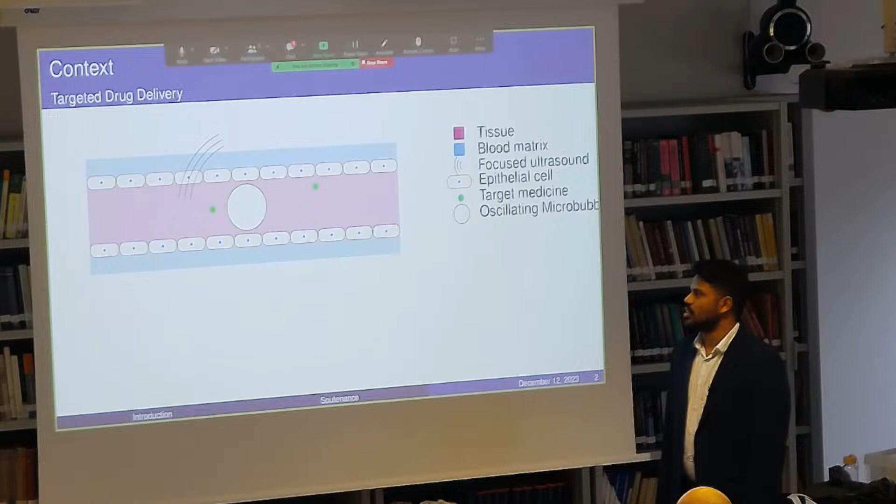Once it reaches the target location or the tissues where there is a tumor, you can use focused ultrasound. These microbubbles respond to the ultrasound waves. It can have a stable cavitation or a collapse, and it can increase the porosity of the capillary. Capillaries are the smallest arteries, which have the thickness of just one epithelial cell. So if we can attain some porosity on this layer of epithelial cells, we can increase the intake of medicine at the target location.

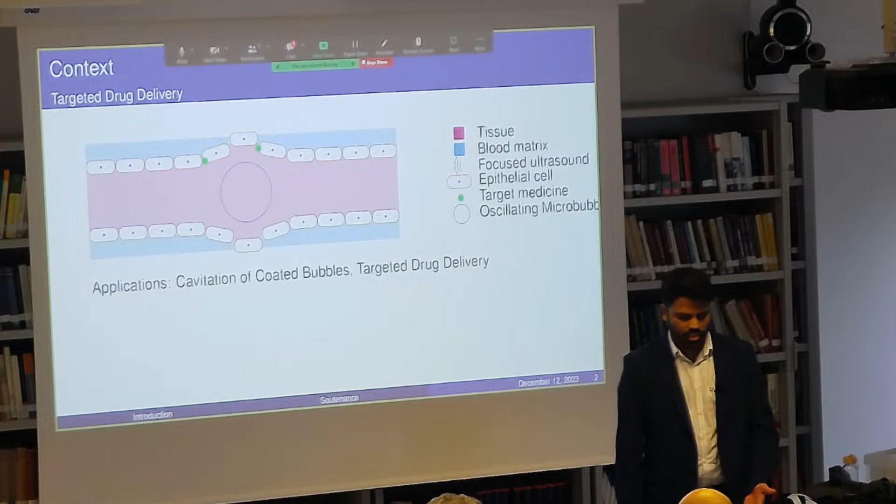Coming to my particular problem, the problem involved here is a very complex multiphysics problem. It involves a bubble which is responding to ultrasound. So here we have a multiphase system. We have a blood matrix and also a microbubble. The further complexity is this is a compressible multiphase flow, because we have a compressible microbubble involved, and these microbubbles interact with the epithelial cells. So we have to capture the fluid structure interactions also.

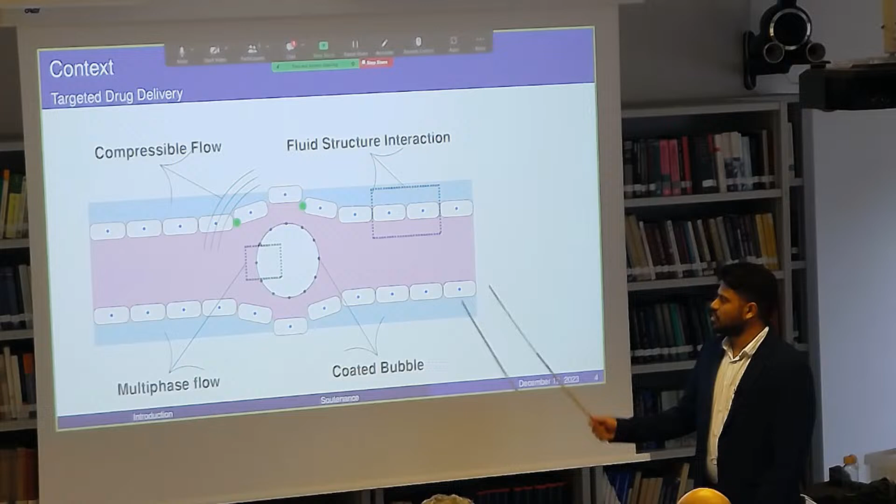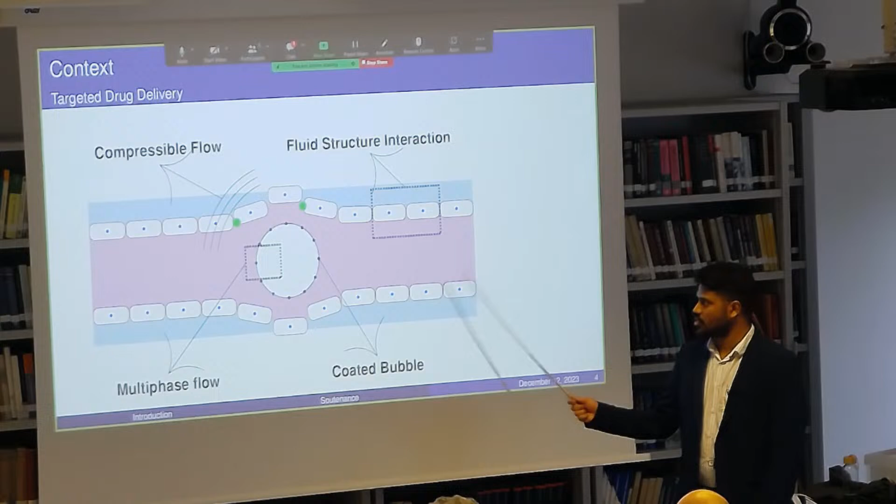We are trying to capture all this except the coated microbubble, because it's out of my work. And our approach was to capture minimalistic simulations of cavitation. So we had to focus on developing a multiphase flow code that can capture compressible flows and also the interaction of these microbubbles with the blood vessel.

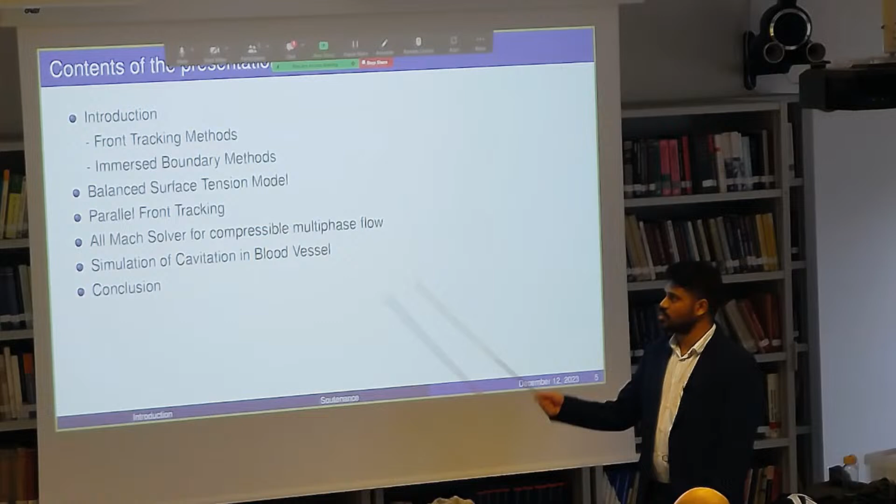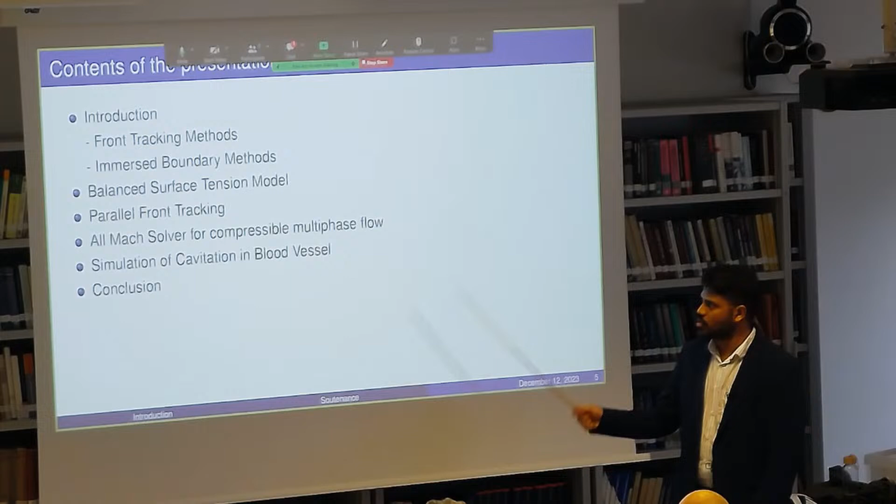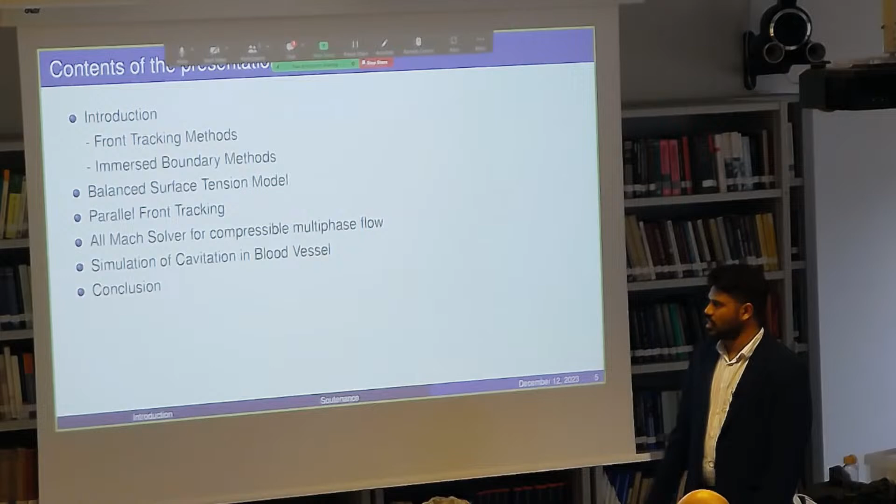The presentation has an introduction on simulation of multiphase flows using front tracking methods, and also development of immersed boundary methods with a similar approach in the code, and a balanced surface tension model in 2D. The main focus of my work was developing a parallel front tracking method. That is the one on which I have spent most time. Then the next one is extension to a compressible system, and just one simulation I'm showing here, which involves cavitation of a microbubble inside a blood vessel.

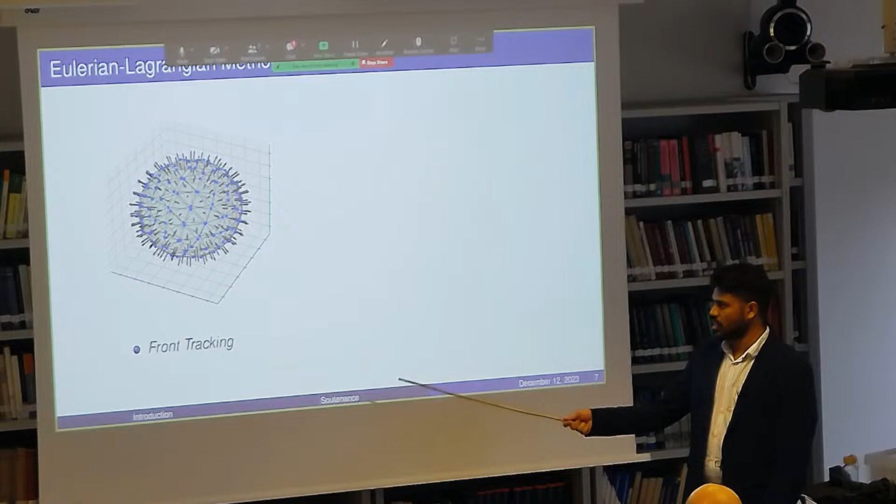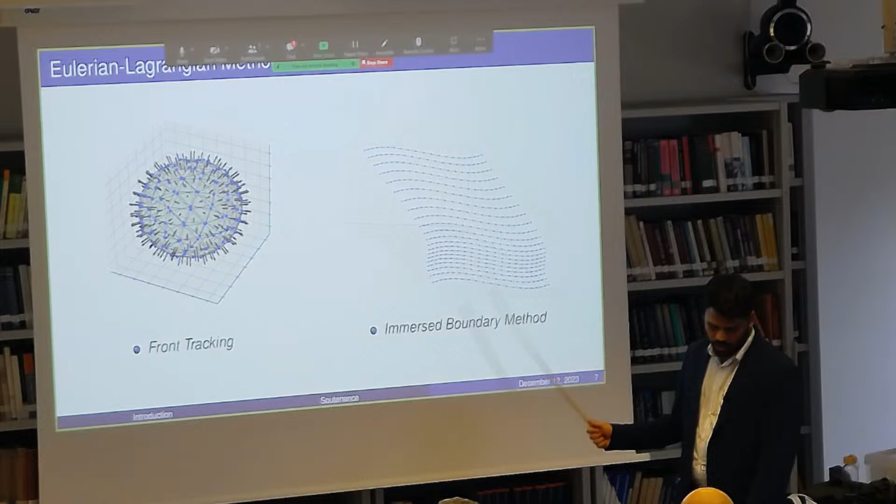So both the front tracking method and immersed boundary method can be put under the Eulerian Lagrangian system of numerical methods. In case of front tracking you have an interface separating two fluids, and in case of immersed boundary, if you assume the membrane is of zero thickness and constituted out of fibers which are independent from each other, then we have this kind of structure for a membrane. So we are trying to simulate mostly 2D and axisymmetric simulations involving both.

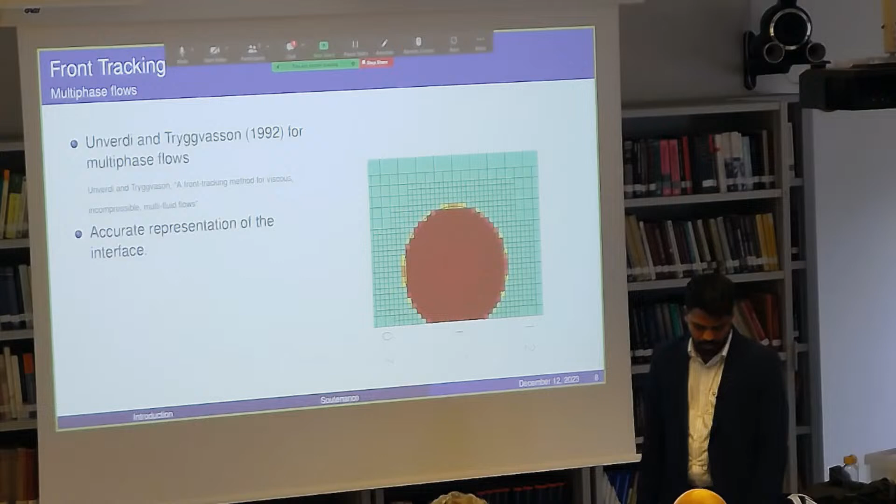So the front tracking method is developed to capture multiphase flow simulations. So here you have an example of a contact line problem. It was developed by Unverdi and Tryggvason. It is inspired by the immersed boundary method originally done by Peskin.

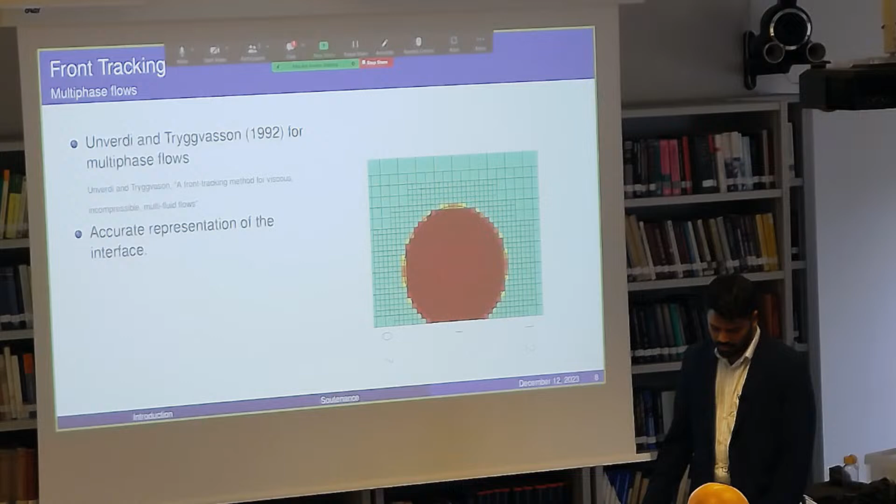So the advantage of the front tracking method is that you have an explicit representation of the interface compared to other multiphase flow solvers like volume of fluid and level set. You have explicit information on the interface. This gives the advantage of an accurate representation of the interface, and also better computation of geometric properties like curvature, etc.

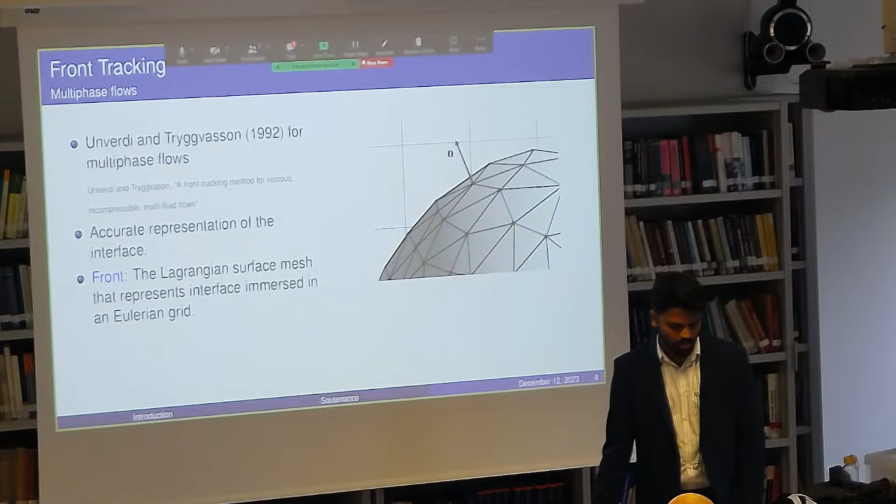So you have a Lagrangian mesh that represents the fluid-fluid interface that is immersed in an Eulerian grid. In 3D, this is comprised of connected triangular elements. We'll call this interface the front, as in the literature. It represents the fluid-fluid interface in the case of front tracking, and we can use the same term for the membrane in the case of the immersed boundary method.

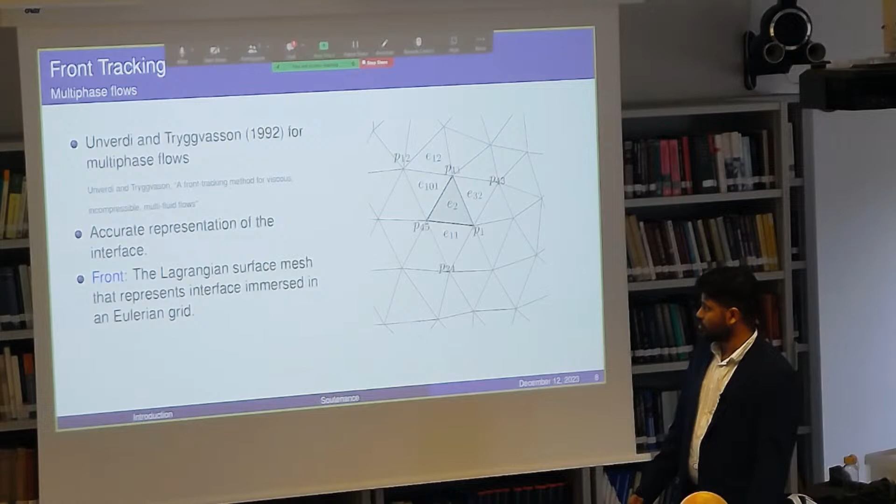So the front is comprised of elements, which in 3D are triangular elements, as we have done in the coding, and these elements are comprised of vertices. We have a data set for that, we also have a data set for the triangles, and we also maintain how these triangles are connected to each other.

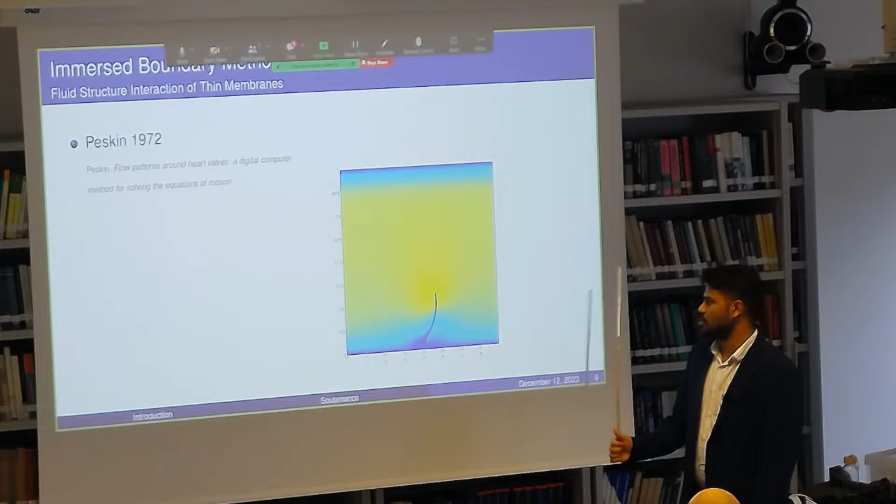Coming to the immersed boundary method, you have a thin membrane which is interacting with the flow. It was originally developed by Peskin in 1972, where he did a simulation of the interaction of blood flow with heart valves.

Coming to the representation of the interface in the immersed boundary method, in a 3D simulation you have a mapping from R2 to R3 corresponding to the initial configuration and the final configuration. At any moment the configuration has an elastic energy which can be written as a functional of the points and the geometric properties of the topology. Any change in the topology corresponds to a change in the energy functional, from which you can calculate the Lagrangian force density. This I will mention in coming slides.

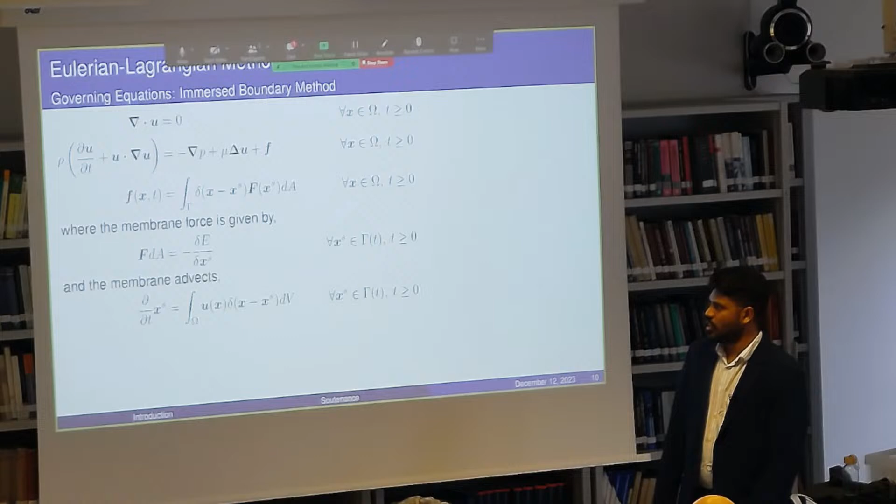So both systems, since they involve fluid, in the case of the immersed boundary method we have the Navier-Stokes equation with a source term corresponding to the membrane force. The membrane force can be represented as a Fréchet derivative of the energy functional, and that can be interpolated to the Eulerian grid using a discrete delta function. The membrane advects in time using the local velocity of the marker point, which we calculate from the Eulerian grid using a delta function.

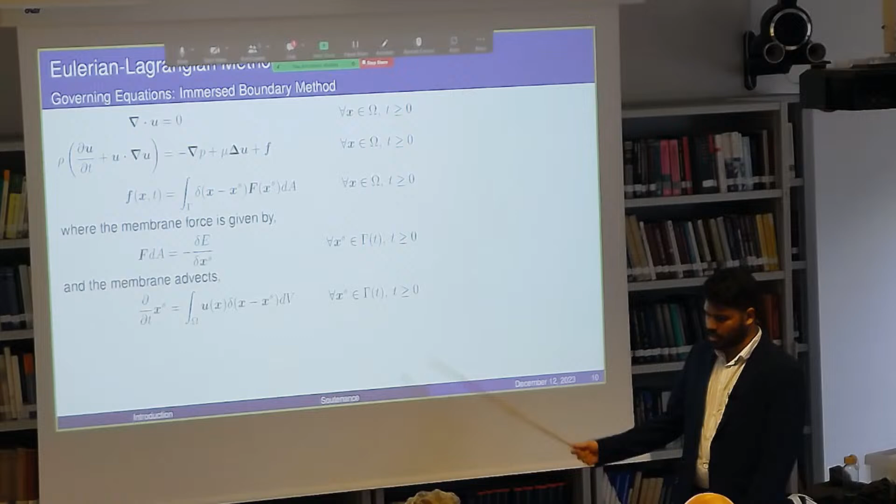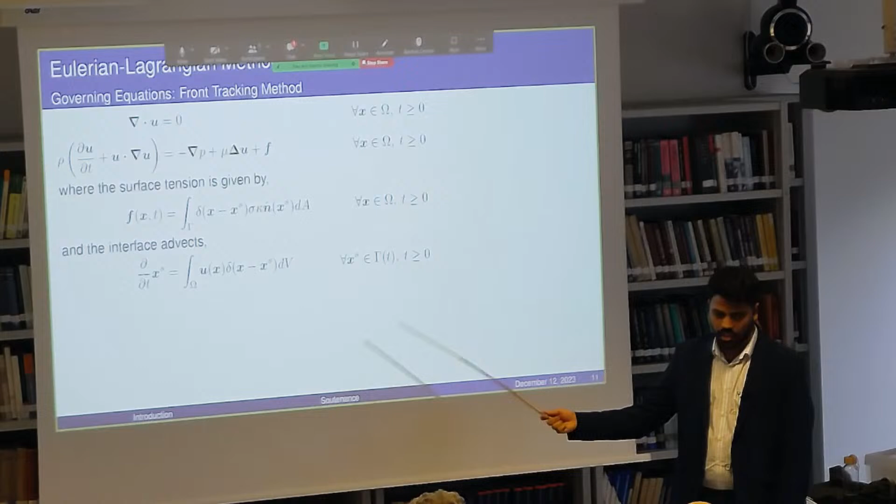In front tracking it's similar, except instead of using a Lagrangian force density from an energy functional, here we calculate the Eulerian force density from an interpolation of the surface tension. And similar to the advection of the membrane, the fluid-fluid interface also advects with the local velocity, which we calculate from the Eulerian grid.

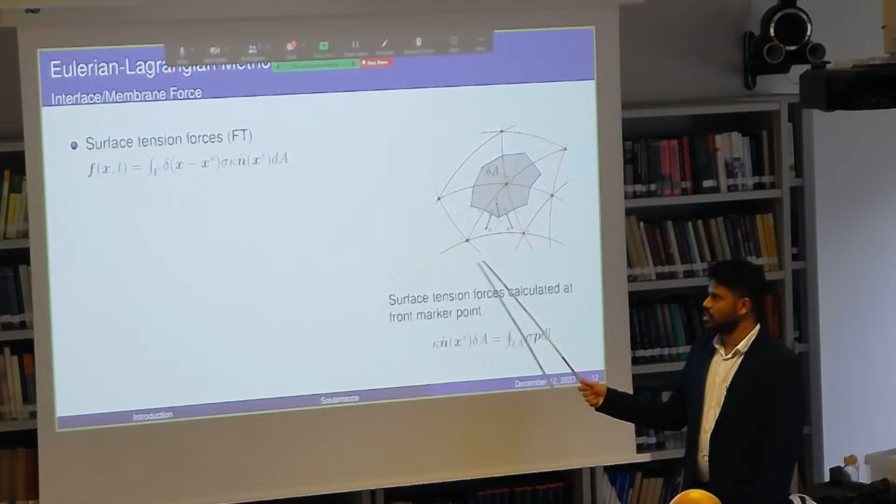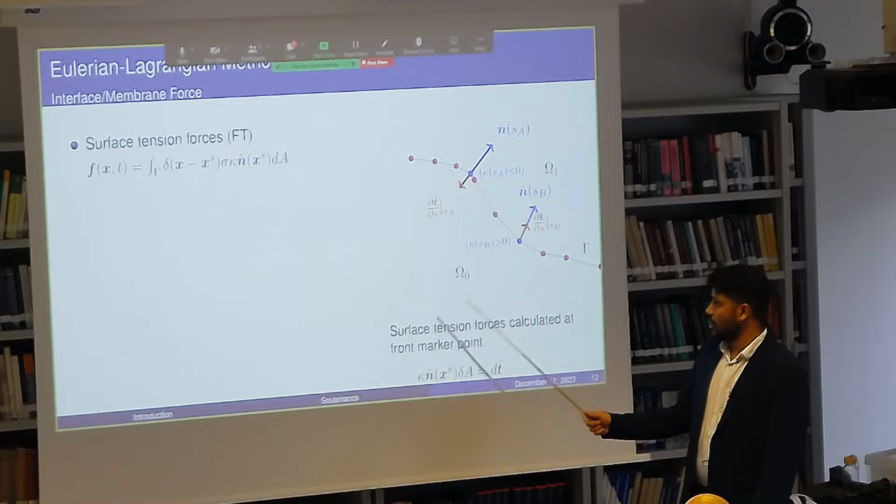So in both methods, we have to do two kinds of interpolations. One is you have to interpolate the force from the geometric or Lagrangian mesh to the Eulerian mesh. In 3D front tracking, you can calculate the force density on a small patch of the interface using a line integral, or in 2D you can find it using the derivative of the tangent.

In the case of the membrane, if you assume the membrane is comprised of closely packed fibers, we can find the force density corresponding to each fiber. If a fiber goes through an elastic configuration change, it gives rise to a tension force in the elements. And if we have bending in the configuration, it gives rise to the bending restoration force. These we calculate on an element or elemental patch, and we have to interpolate them back to the Eulerian grid.

For each Eulerian grid point, you have to interpolate from the nearby elements of the Lagrangian mesh. The other interpolation involved is interpolation of velocity. We interpolate the velocity from the Eulerian grid to the Lagrangian points, and then we advect the points using explicit time integration or Runge-Kutta integration. So you can see how the velocity can be interpolated at a Lagrangian point from the nearby grid points of the AMR grid.

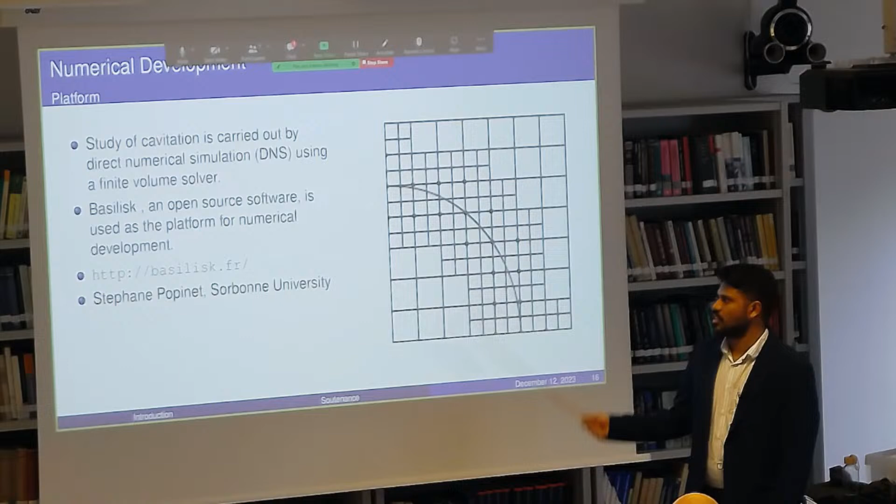And for both the methods, I have used Basilisk by Stéphane Popinet to develop front tracking and immersed boundary method. So the advantage, as everyone here would know, the Basilisk solver gives you adaptive mesh refinement, which gives you the freedom to refine the region depending on the requirement. So if you have different length scales involved, you can capture everything without a uniform grid of maximum resolution.

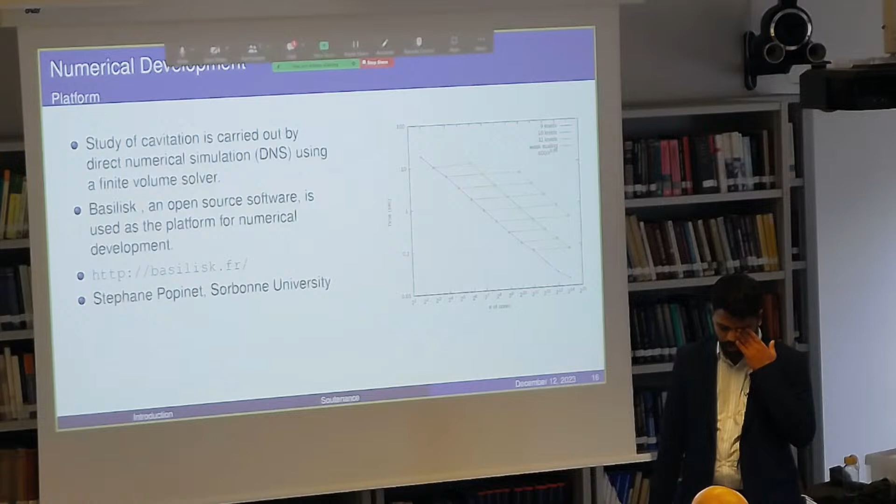So it gives a lot of computational and resource advantage, which is one of the main focuses of my parallel front tracking. And it also has very good scalability, which is shown on the website, and everyone could refer to that. So I'm moving to the next portion.

So we developed a balanced surface tension model. Going to the particular test case, if we take a bubble or a drop which is immersed in another fluid, in the absence of gravity or any other body force, it should remain at equilibrium with no velocity at any point in the whole computational domain. But the discretization of the terms in the Navier-Stokes equation can bring some inconsistencies, which can give rise to a non-zero velocity, which we call spurious current. If we don't take care of this, the computation can diverge and stop.

In this particular case, the Laplace pressure jump is balanced by the surface tension. And for discrete momentum conservation, if we can represent the surface tension as a derivative of a tensor, we can have momentum conservation. So two of the main aspects of a balanced method are that the curvature computation should be accurate and converge to a constant, and the gradient operators in the pressure gradient and surface tension should be consistent. This is well discussed in almost all multiphase flow problems.

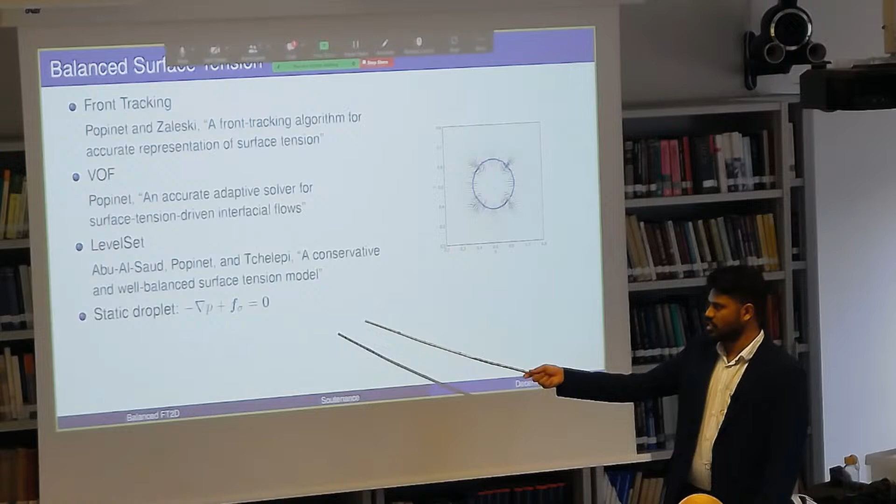So this work is very similar to Popinet's 1999 paper, except for a few things like the way I handle interpolations and the smoothing algorithm. As mentioned, the pressure gradient should balance with the surface tension. And if you look into the integral of the x component of this momentum equation in a face-centered cell, you can see the integral carried out on the right and left side.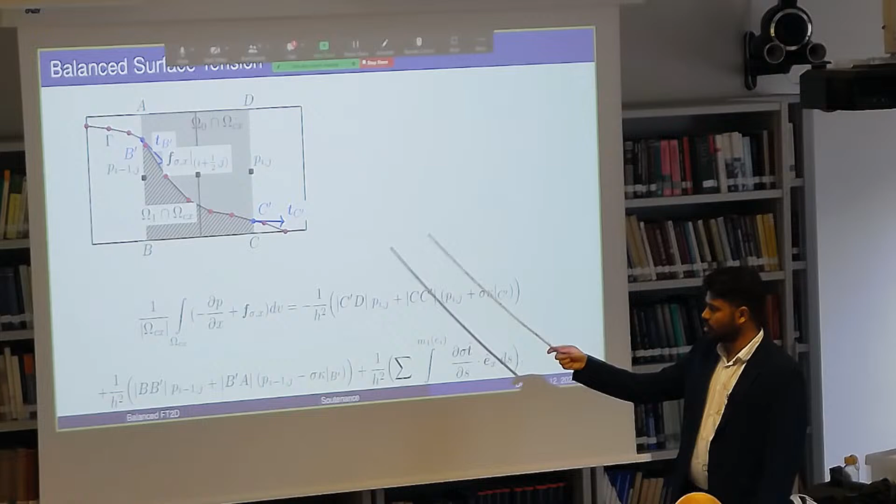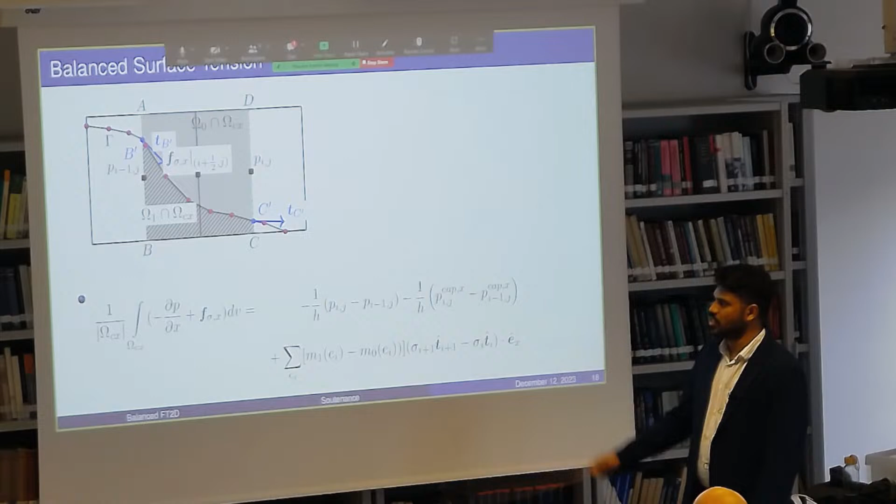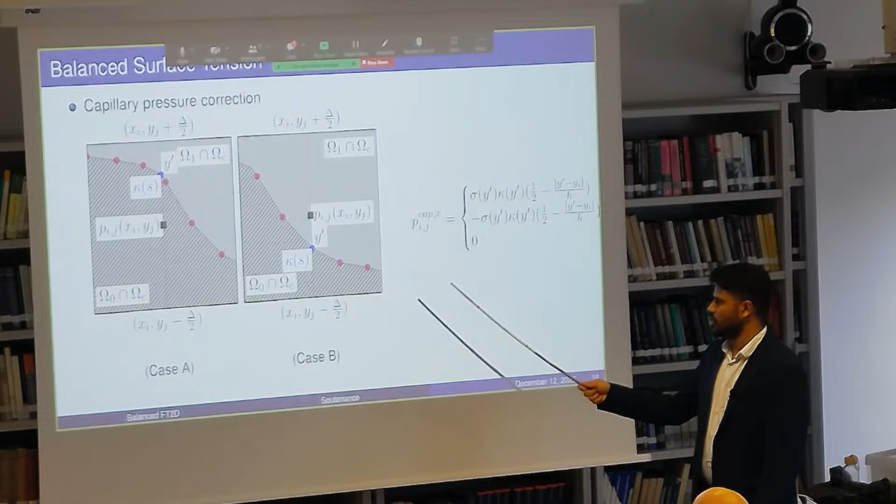Since there is a pressure jump at the interface, we can split that integral, and the integral of the surface tension can be written as a summation over all the elements which intersect with the control volume. So in the end, we have a pressure gradient term with the capillary correction, and the term summed over the front elements which intersect with the control volume. The capillary pressure correction depends on whether the grid point lies inside domain 0 or domain 1.

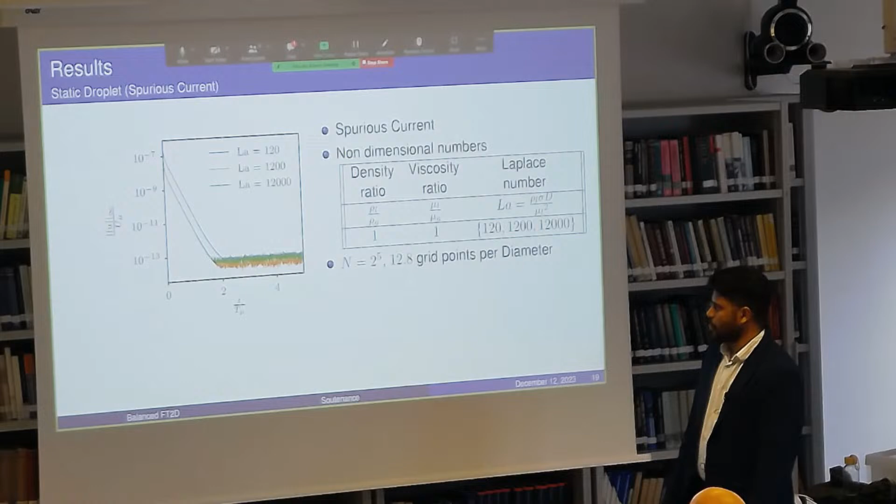Going to a few test cases, we have an interface separating two fluids, a circular droplet of diameter d, with density and viscosity ratios of one and a few different Laplace numbers. The spurious current goes to 10^-13 for density ratio 1, and for density ratio 1000 we cannot achieve that for all the Laplace numbers. It only goes to 10^-6.

I haven't put it in the slides, but if the elements of the front are non-equal, it can give rise to even larger spurious currents, which can be taken care of if we redistribute every few cycles so that the elements are of equal length, because the interpolation error comes into the picture.

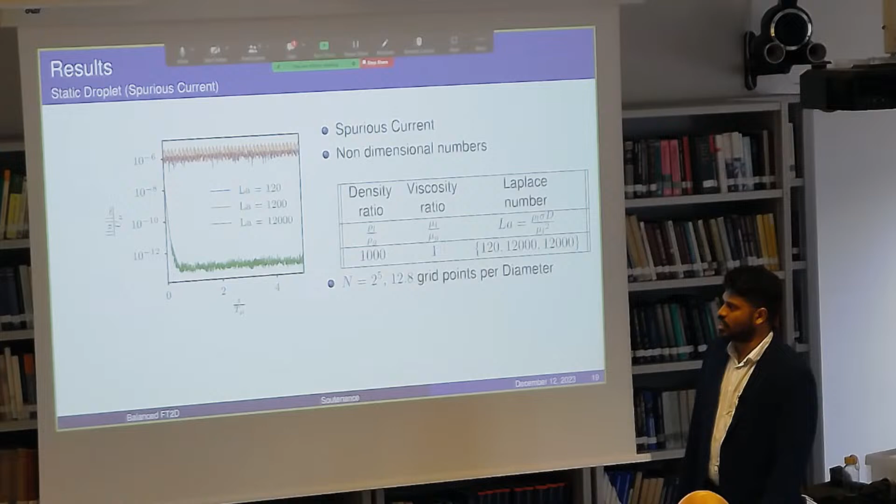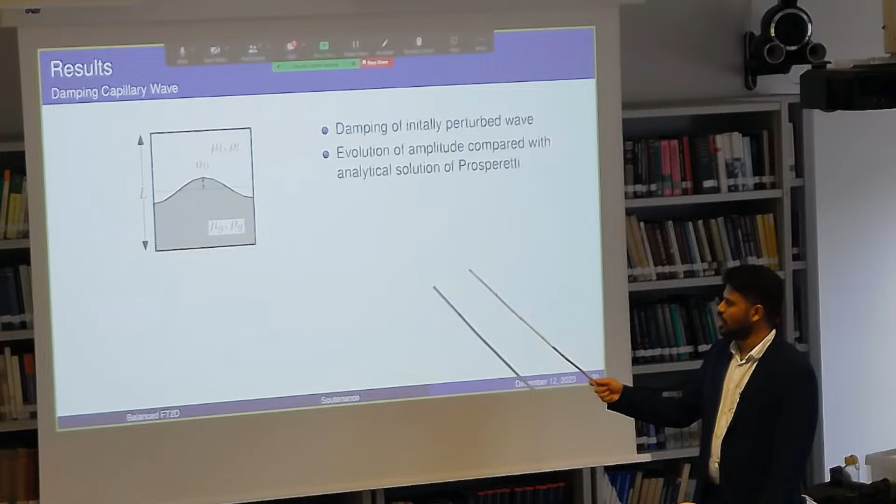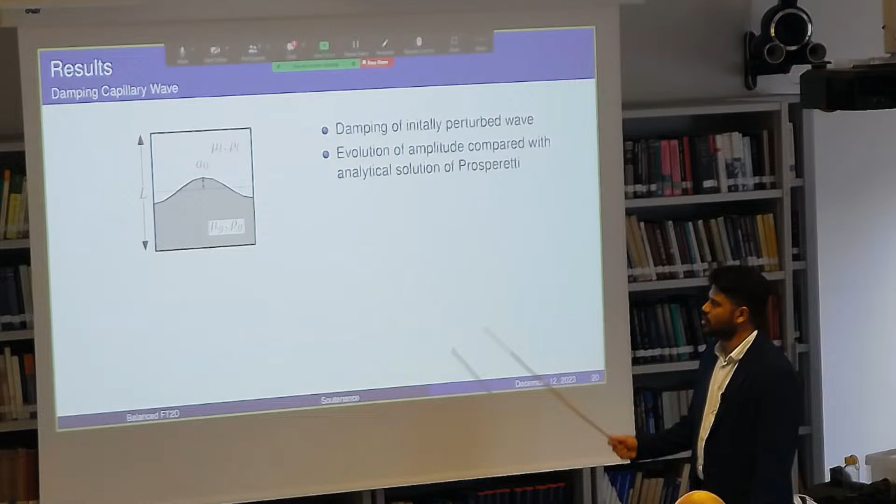And in this test case, you give a small perturbation on an initially flat interface separating two fluids, and if the amplitude of the perturbation is very small compared to the wavelength of the perturbation, we have an analytical solution by Prosperetti. So if we take the non-dimensional numbers, viscosity ratio, density ratio, and Ohnesorge number, and we have a very small amplitude ratio, we can compare it with the analytical solution.

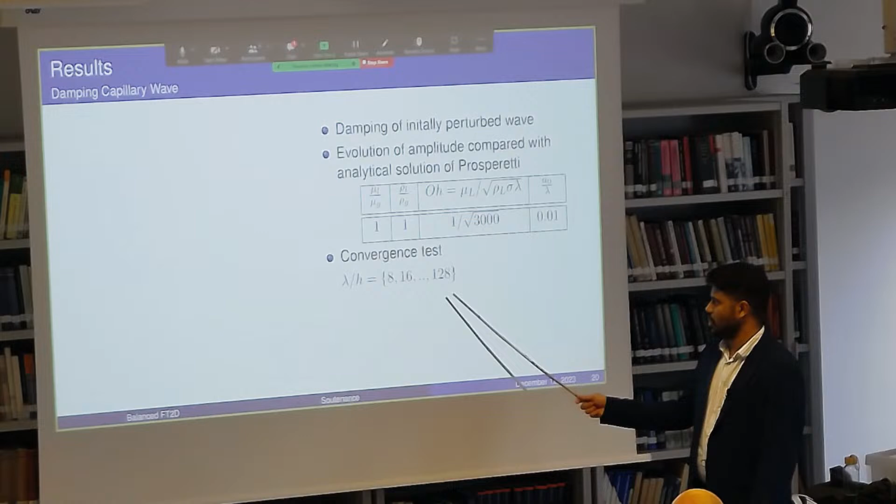And for a convergence test, we take different levels of the AMR grid, and for different levels it has a very good second order convergence. Going to the next portion of the presentation, it's a parallel front tracking method. So I will give a small introduction to the methods which you can see in the literature.

the Lagrangian mesh. But the thing is, this method is not meant to parallelize the front tracking method. They are just focused on parallelizing mostly the Poisson solver for solving the Navier-Stokes equation or the projection method. So the scalability was only looked for the Eulerian mesh. They never cared about the Lagrangian mesh, and this is a layman method, and you cannot expect a parallelization for a Lagrangian mesh.

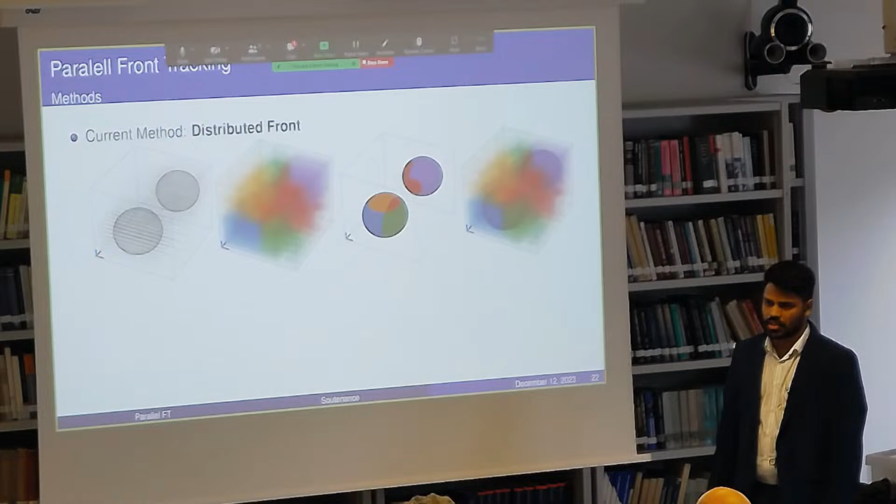So say we have a K-way partition of an AMR grid. We have to distribute the leaf cells and also the vertices and elements of the mesh, and as already mentioned, the leaf cells are distributed using a z-order curve. So you have a z-order space filling curve, you move along the z-order and distribute almost equally based on balance constraints, and the vertices of the Lagrangian points are distributed such that the processor whose domain contains that vertex takes the ownership of that vertex.

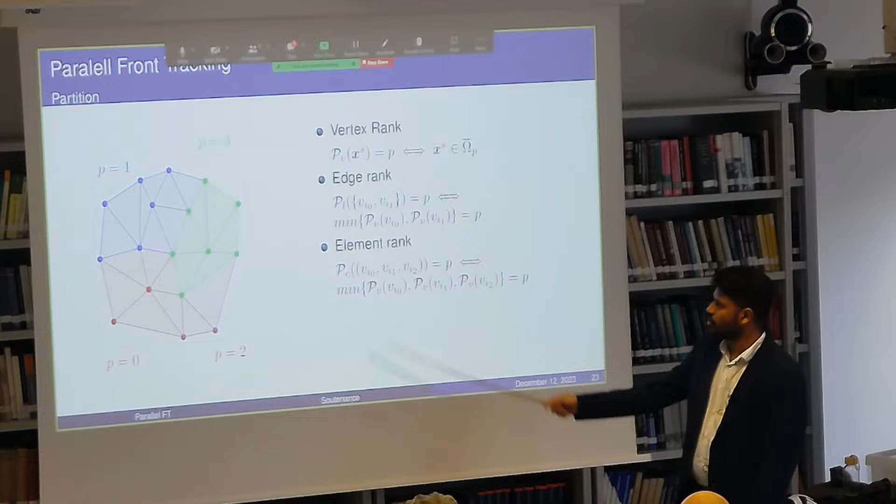So here you can see this area, the region that corresponds to the partitioned Eulerian grid, and all the vertices which lie within that will be owned by that particular processor, and for the edges, the rank of the vertices which share that particular edge determines the rank of the edge. So whoever has the minimum rank takes the ownership of the edges, and whoever has the lowest rank in case of a triangle takes care of the triangle.

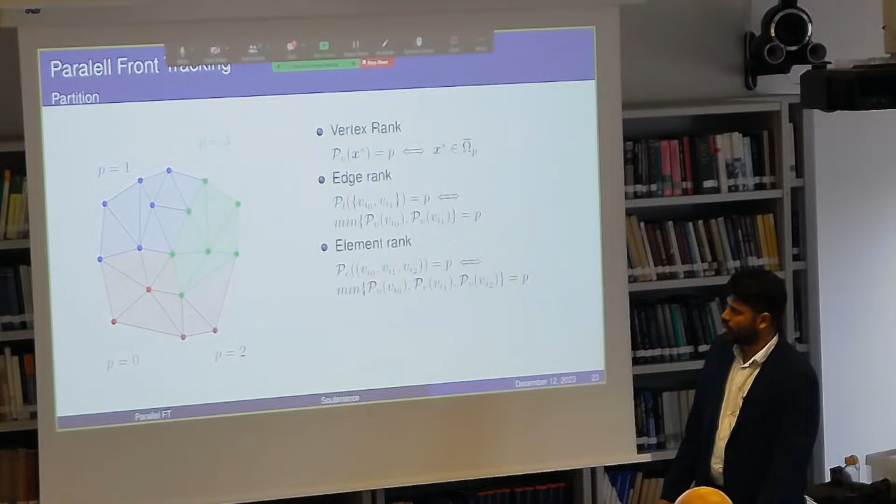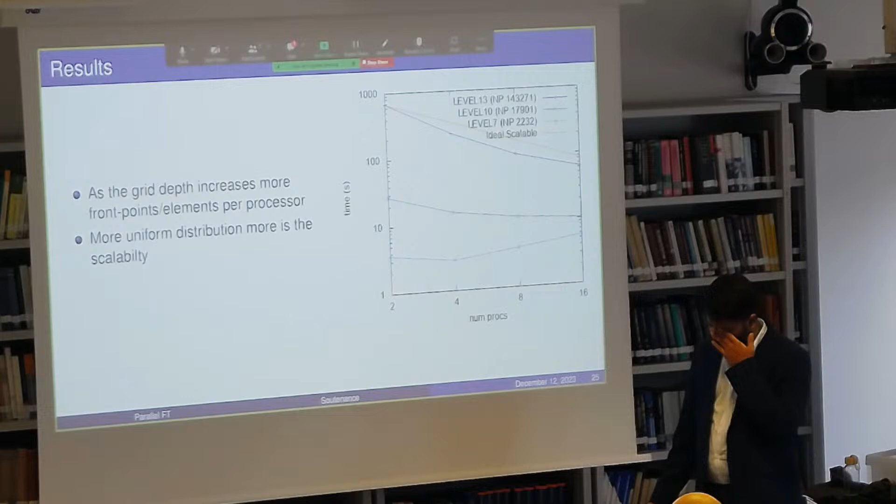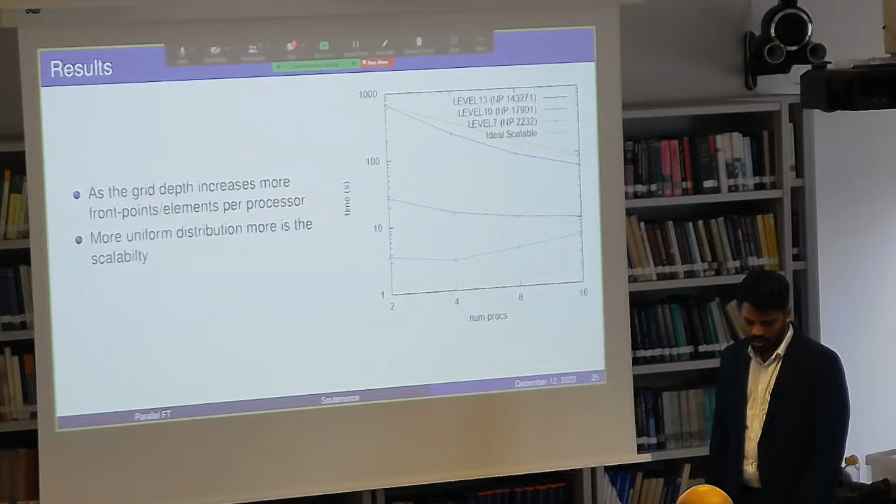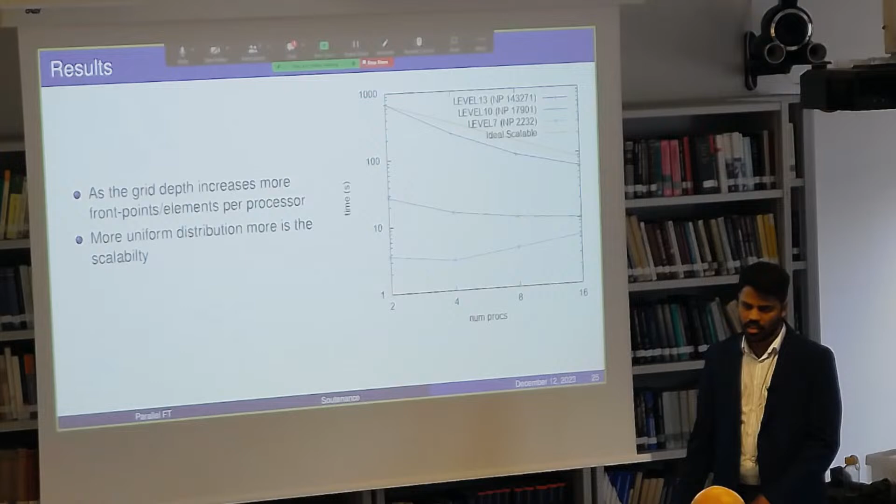So as you increase the level of the refinement, you have more elements involved, and since we have more elements involved, you can expect more scalability, because the communication to the computation on the partition set reduces. You have more points, so you have more computation required, but the communication reduces, so you can expect scalability.

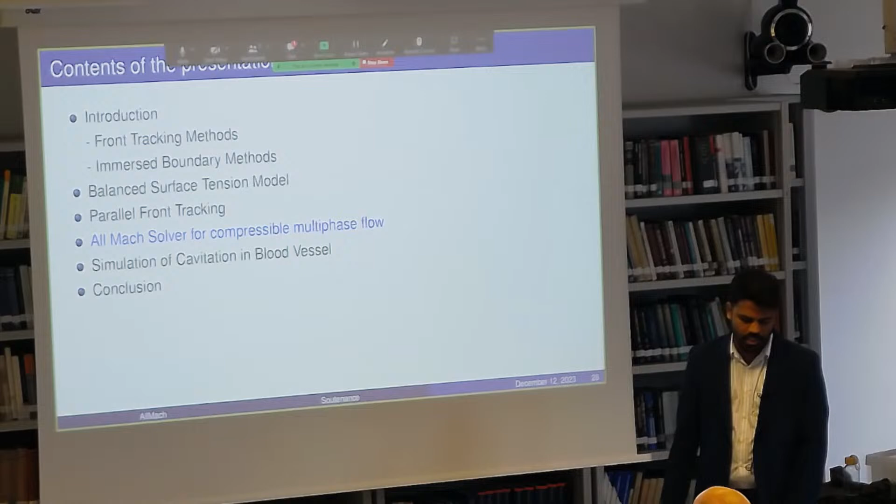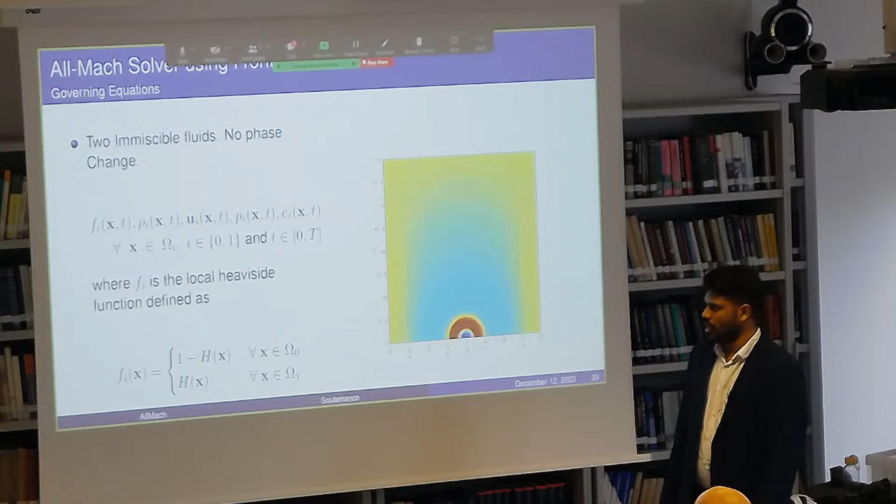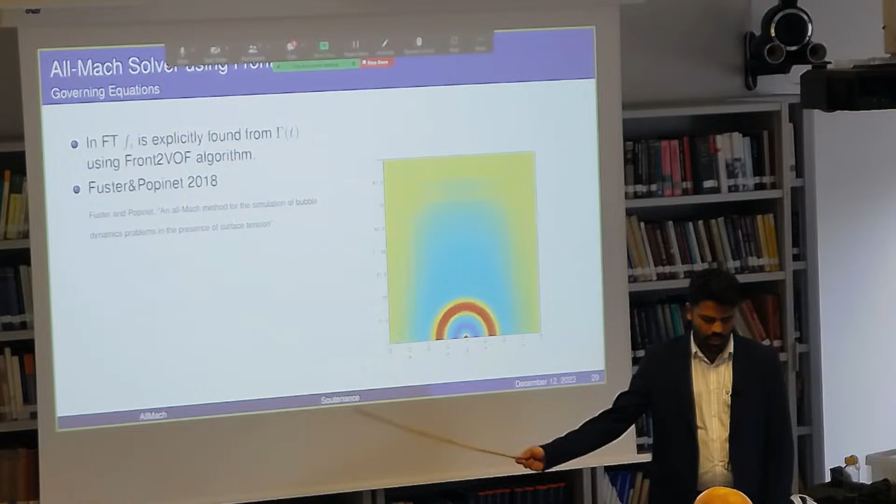So the next portion I'm going to discuss is extension of this front tracking method to the All-Mach solver. So in the All-Mach solver you have a multi-phase system where you have two fluids and correspondingly these many variables: internal energy, pressure, velocity, density, and Heaviside, corresponding to points on both the domains. So this is an extension of the volume of fluid method developed by Daniel and Stefan.

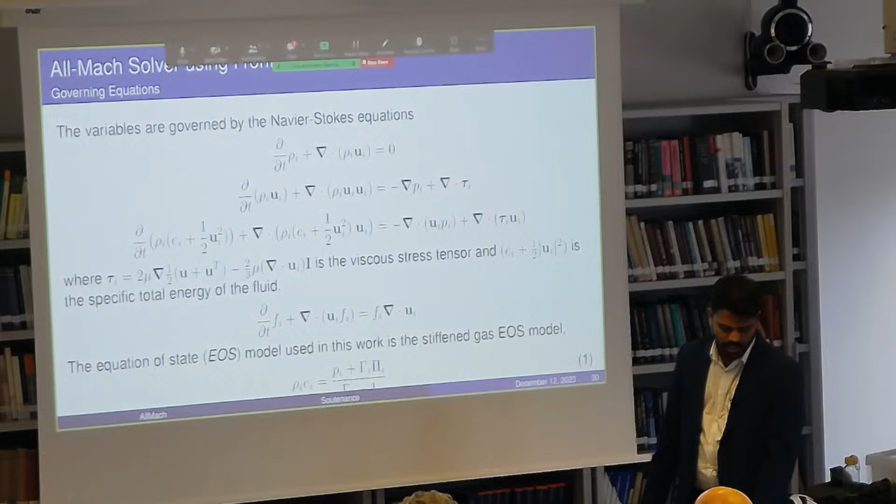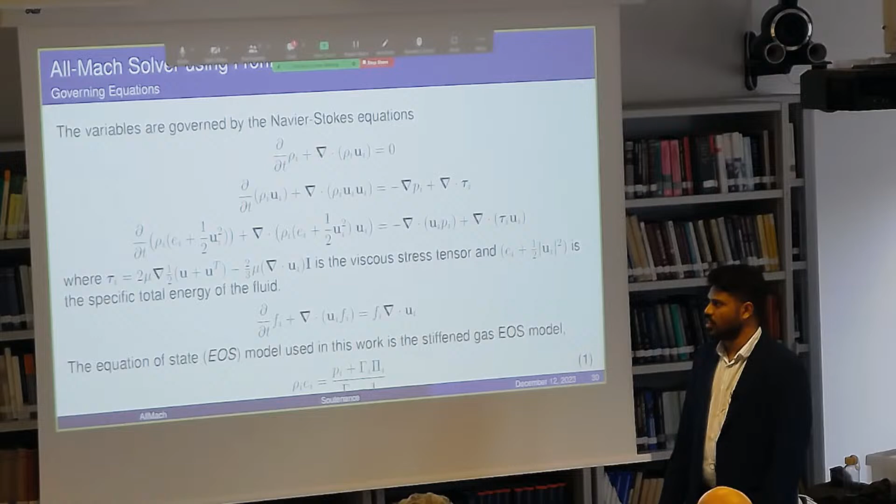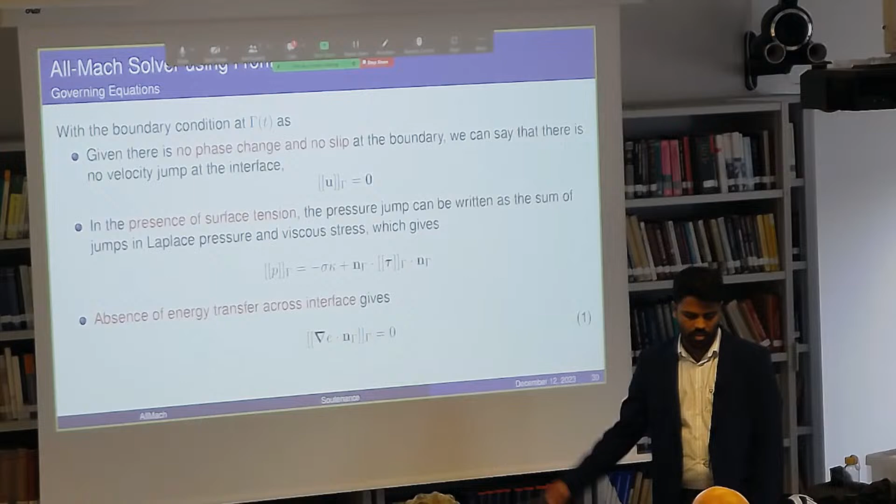So you have correspondingly extra equations corresponding to energy and equation of state, and some of these can be reduced into one equation because F0 and F1 are complementary, but most of the routines are not taken as a one fluid formulation; rather, all the properties, density, momentum, etc. are stored for both the variables. And you have to take care of the variable jumps at the interface. Since there is no phase change and no slip, there is zero velocity jump at the interface, and the pressure jump corresponds to the Laplace pressure jump and the viscous stress jump. And since there is no energy transfer across the interface, we can take this equation.

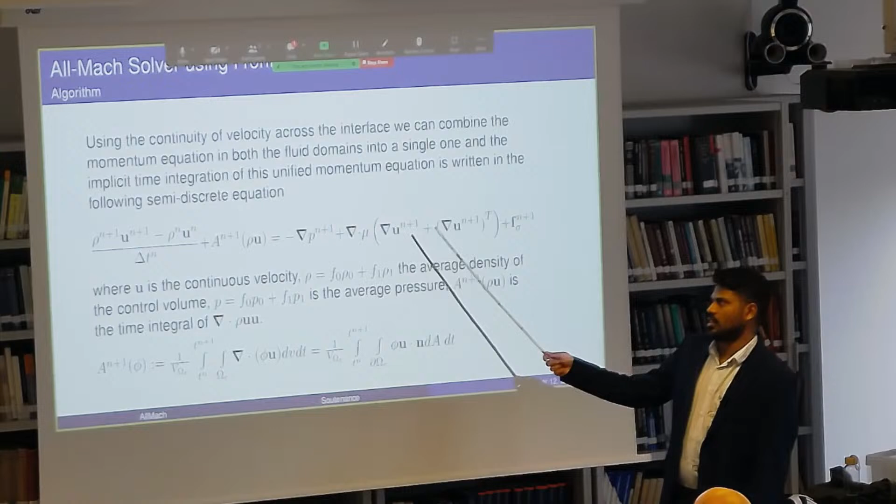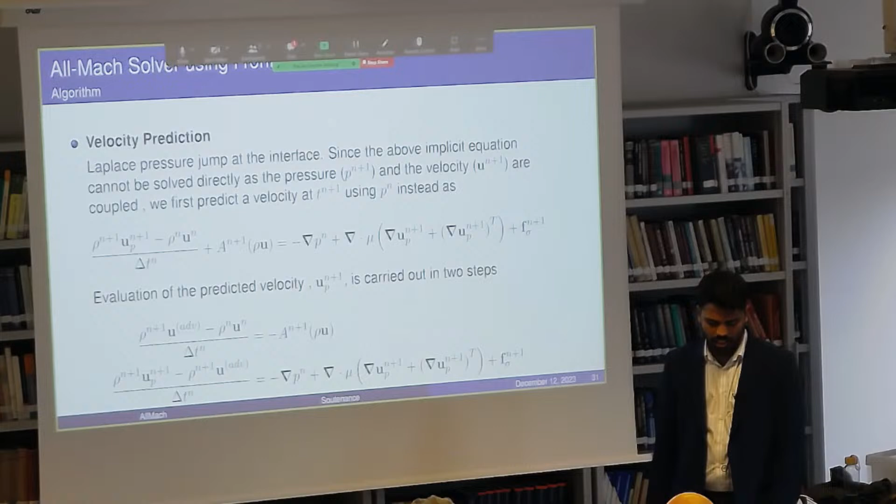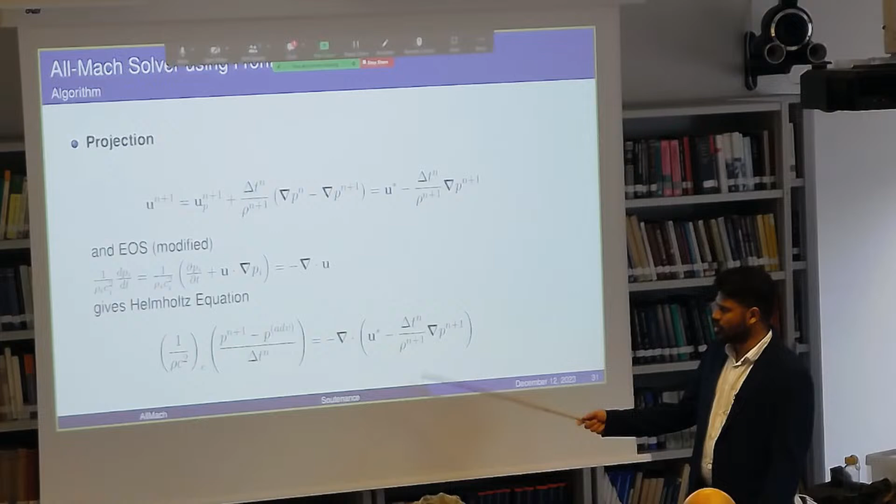So we have the implicit equation of the Navier-Stokes equation, which cannot be directly solved because we have u n+1 and p n+1 involved. Rather, we try to solve a predicted velocity at n+1. This equation can be split again into two. So first you calculate an advection velocity, or u advection, using consistent advection, which is there in the All-Mach paper by Fuster and Popinet. Once you calculate the advection velocity, you can calculate the predicted velocity, and with some manipulations you can come up with a Helmholtz equation, and you can solve p n+1 and u n+1, and also you can update the internal energy and total energy of the system.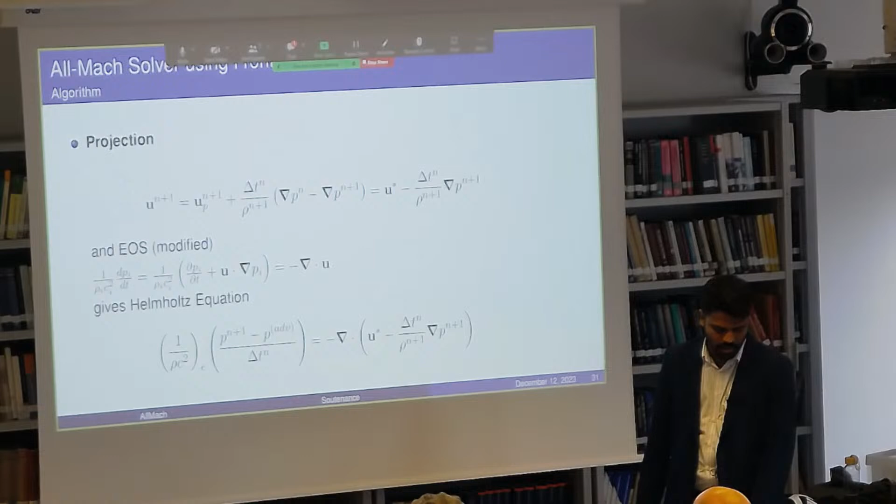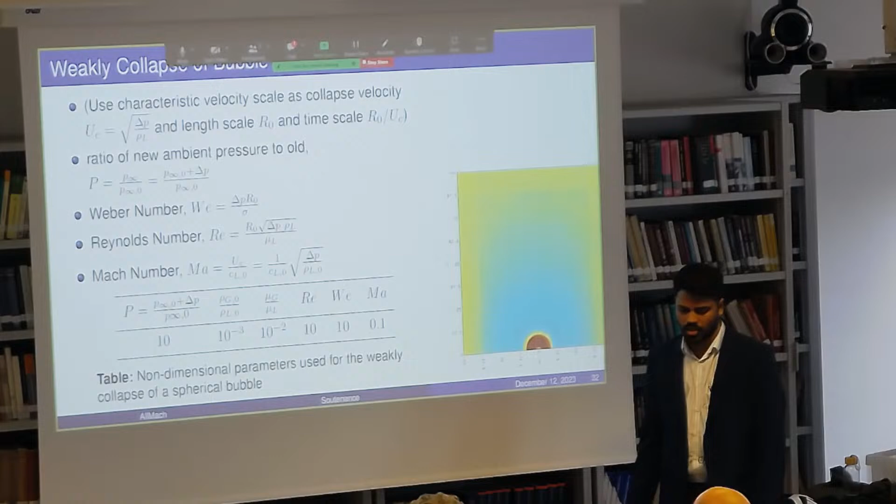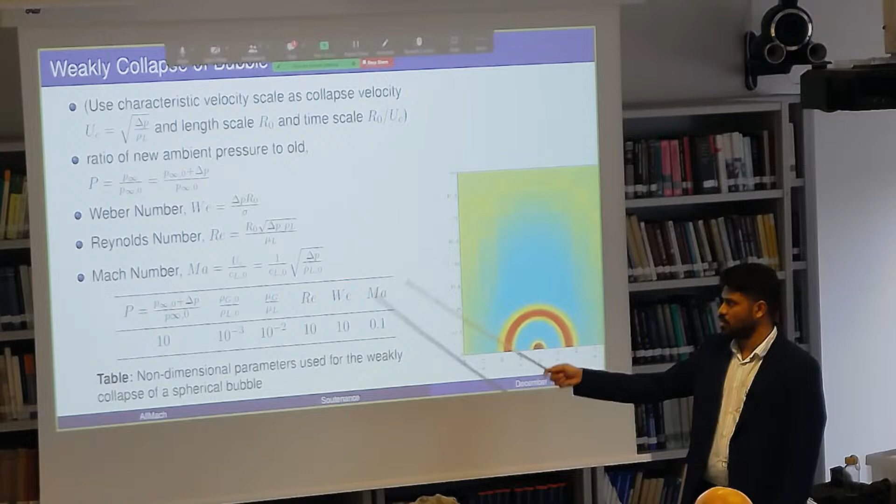And I'm giving only one test case here. So we have a weakly collapsing bubble. A bubble which is very small here, initially at equilibrium with the ambient pressure, is suddenly applied with a pressure jump, which will take the bubble into a new equilibrium radius with few oscillations. So if we take the non-dimensional numbers involved, you can compare it with the spherical collapse one-dimensional solution using Rayleigh-Plesset and Keller-Miksis. I have also compared with the original All-Mach paper.

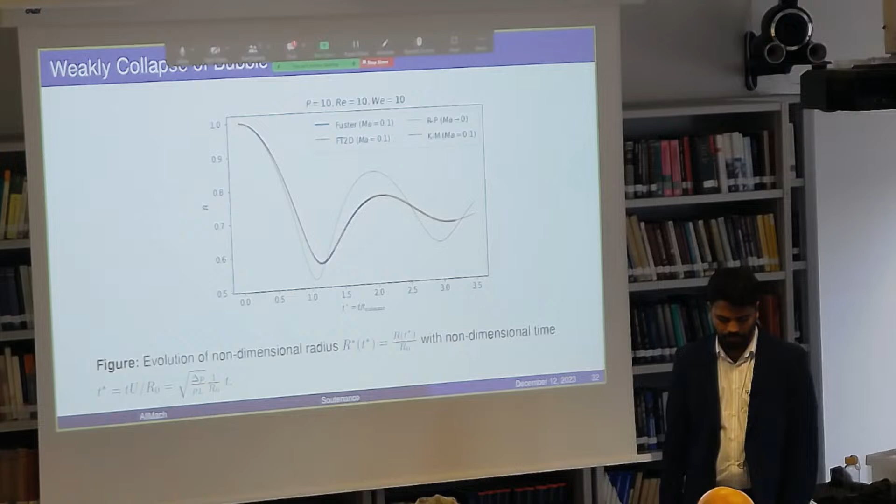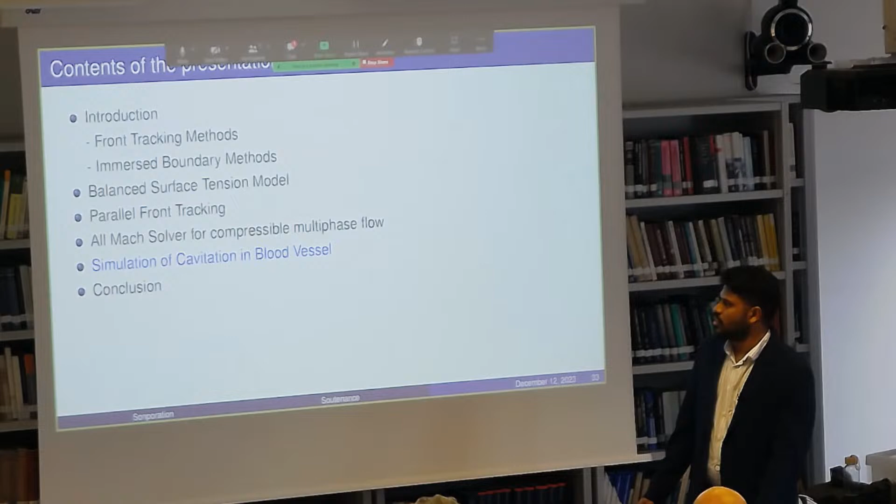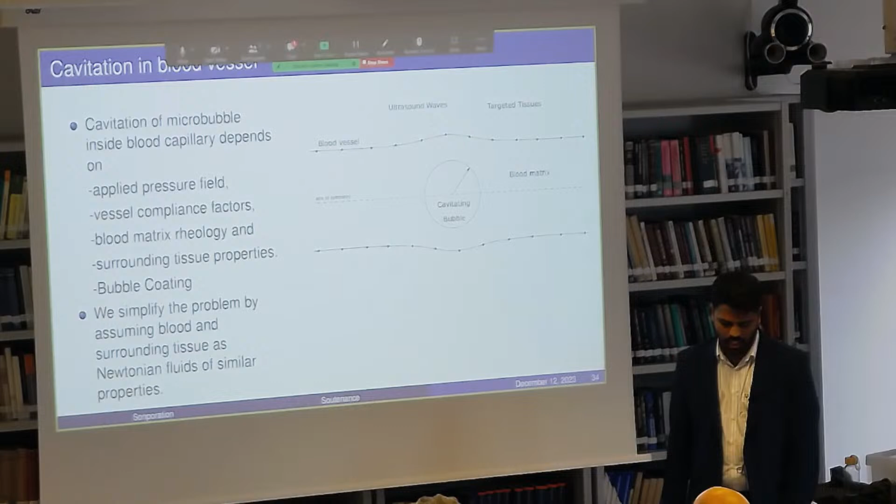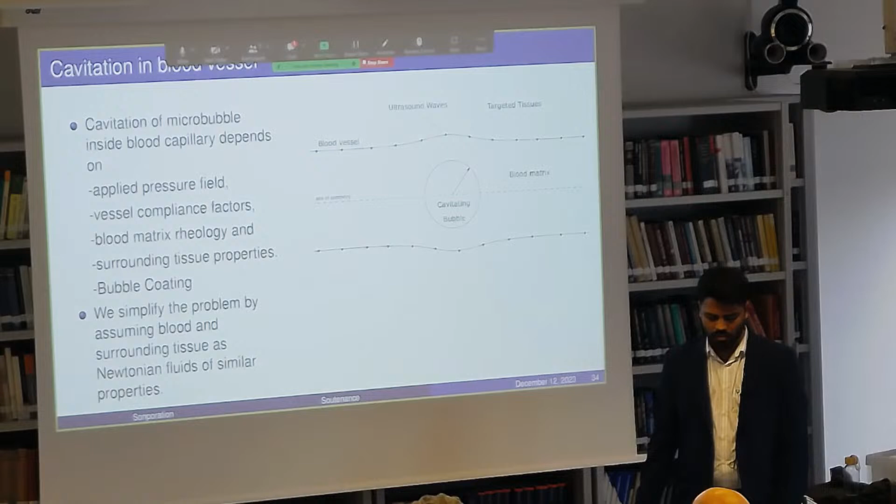So coming to the last section of this presentation, we have simulation of cavitation in a blood vessel. Here I haven't pondered in depth because of the time limits. I have done only a few simulations of cavitation of a bubble in the vicinity of a membrane. One of them is cavitation of a microbubble inside a blood vessel. Here we take a lot of assumptions. We assume the bubble is kept exactly at the center of the blood vessel, the membrane is of zero thickness, and the tissue outside the blood vessel is Newtonian, which is an initial step in the computation.

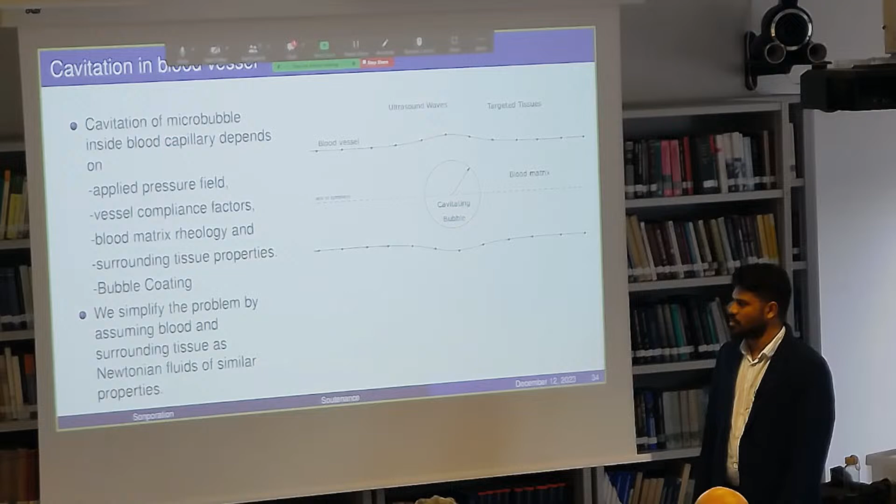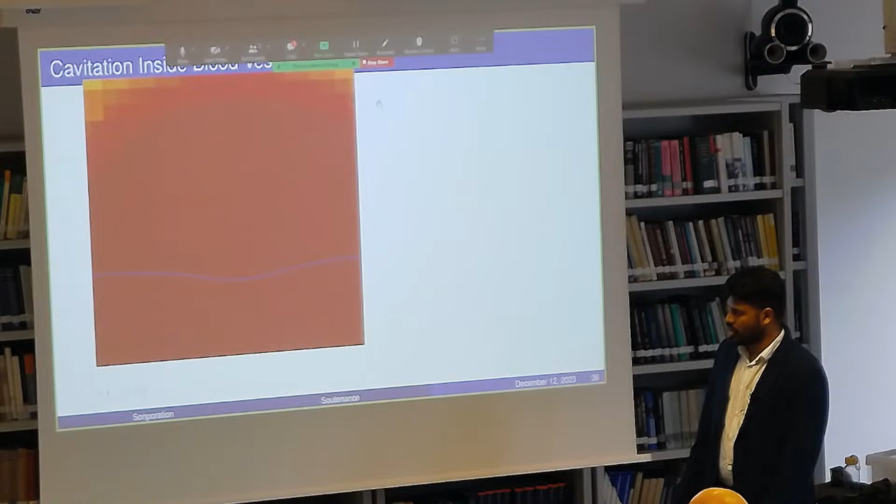So I have done only one simulation here, where the non-dimensional numbers correspond to a blood capillary and the fluids involved in it. The blood can be taken as a Newtonian fluid which is close to water, and the bubble is assumed as comprised of pure air. So you have corresponding non-dimensional numbers for the particular case. And also I have taken E2 equal to 0 because I have taken the bending moment 0 in this simulation. So you have a pressure jump which makes the bubble collapse inside a thin membrane.

Yes. Yes, I will move to the conclusion of the presentation.

So my main focus was on development of a scalable Eulerian Lagrangian solver, and another main focus was on developing it in an AMR environment. Implementation-wise, it's done in 2D and axisymmetric. Even in 3D, it works in serial test cases. But I have done scalability tests only for 2D and axisymmetric problems.

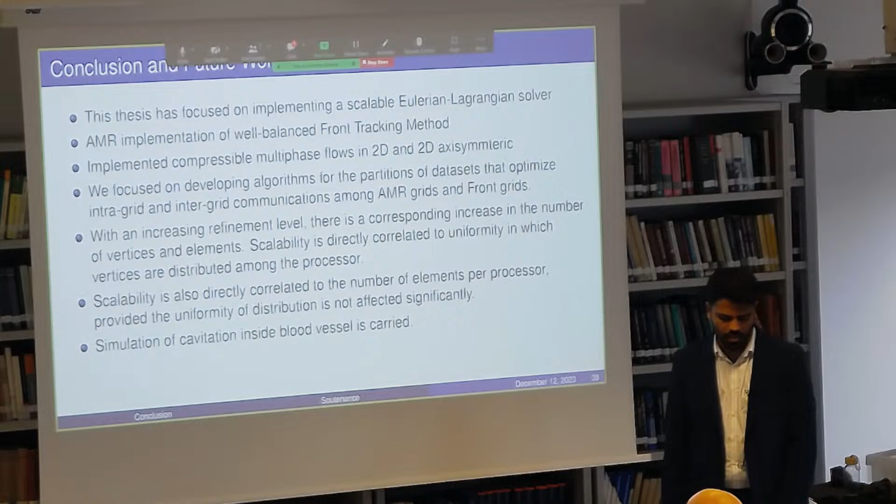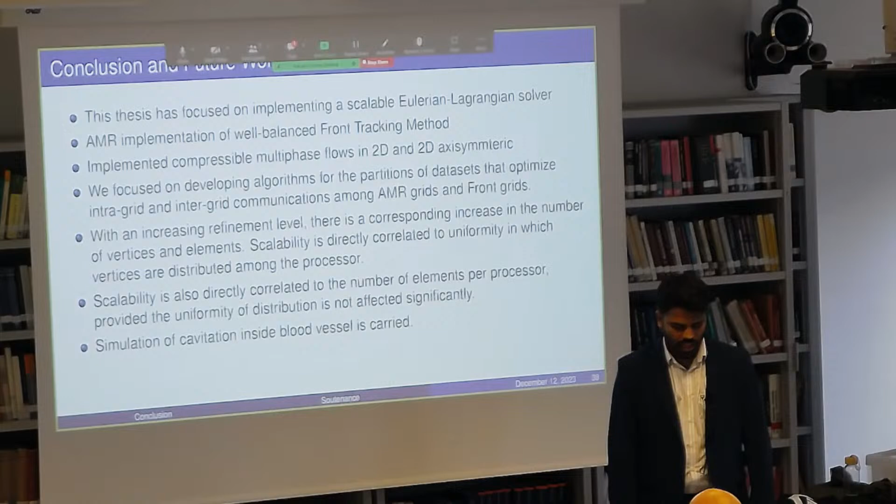So the main focus was basically how to optimize a parallel front tracking method. So I developed partition algorithms and communication algorithms in such a way that communication is minimum and partition is in accordance with the AMR grid. And as the number of refinement levels goes up, you can expect more distribution in the points and also better scalability in 2D.

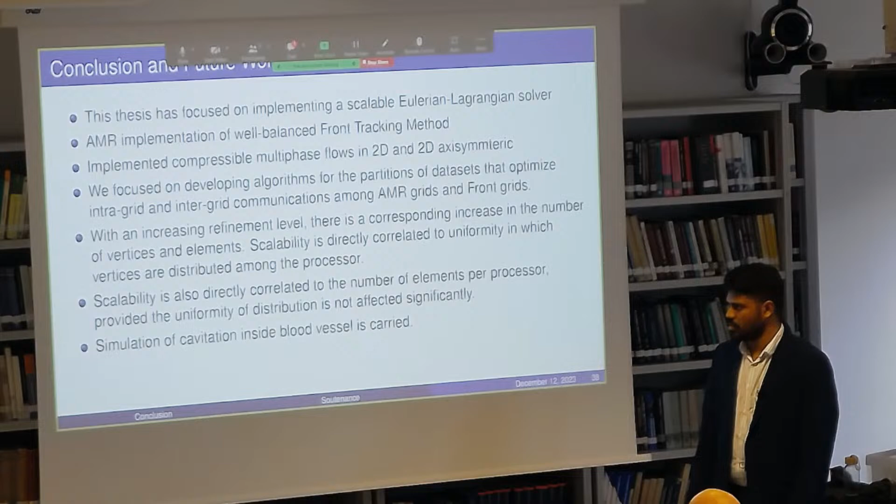So the simulation is only, like, in case of cavitation or inside a blood vessel; this still has to be carried out for more parametric studies which are still lacking in the thesis. So I have listed some work which I have started and couldn't yet finish. Most of the algorithms are developed in a similar structure both for 2D and 3D, and

we still need to discuss more on regridding and topology changes, especially in 3D, because those are two fundamental characteristics of Eulerian Lagrangian methods like the front tracking method. And another aspect is a lot of parametric studies are yet to be done. I have started some work on studying the resonance frequency of microbubbles inside blood vessels, but it's still not complete. I have to carry out a lot of study on that.

And another one was studying the stress and strain of the compliant vessel. The problem here is we have taken an assumption that it's a zero thickness membrane, which in the real case it's not. So maybe the immersed boundary has to be extended to a 3D one with non-zero thickness. So yeah, these are the things I'm planning to do.